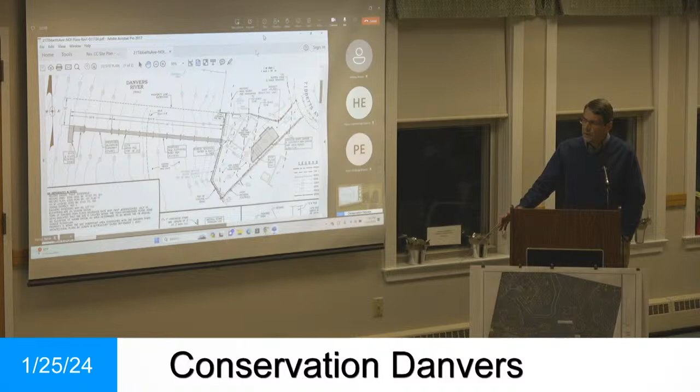There was a request that we consider increasing the spacing of the pile bents, so that's the spacing between each pair of piles here. Previously, we were at 15 feet spacing, and we've stretched it out to 20. We did look at some alternative materials that would allow us to go to 30 or 40 feet, but it more than doubles the cost of the pier, so it's unfortunately economically prohibitive. By using a better quality lumber on our stringers, we can get to this 20-foot spacing, and so we actually lost 4 piles as a result of that.

We ended up putting 2 of them back. You can see that that has a 10-foot spacing out there instead of the 20, and that's to better resist ice floes and materials floating up and down the river in the storms or in the winter. So it provides a little bit more resistance in that area, and we felt that that was important given the currents and given the location in that particular area.

We also lost 2 piles out in the float area. You can see we now have an L-shaped float instead of a T-shaped float, and so we lost 2 piles out in that area. So we do have an overall reduction of 4 piles, so that's a little less bottom disturbance.

Now we increased the length of the fixed pier about 9 feet, but we reduced the overall length of the pier and floats by 13 feet. So the overall length is 13 feet shorter than it was before. It's 32 feet off of the extension of the property line. I think we were around 25 with our T-shaped pier before. So this is a distance that would pass waterways review. It's pretty typical to be at least 25 feet in situations like this.

In this particular case, and I'll ask you to bring up the aerial graphic if you can, please. We have a waterway width of 510 feet at low water, and we're about 100 feet into it. So we're at 19.6%. So we are conforming to that 1996 Corps of Engineer guidance.

And I happen to have a high tide picture here, but this is a low tide picture. Let's see if we can pull it up. Sorry, I know, it's slow. We're getting there.

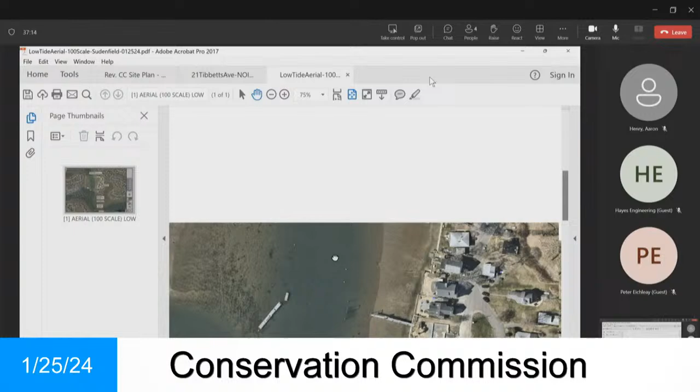There's the loop on Tibbetts. There's Mr. Sudenfield's property. And so here he is coming out 216 feet from the seawall to the end of the float. And there's the width. You can see the low water line very clearly here and over here.

So at its narrowest point in this area, it's 510 feet. So 216 is the overall length. It's 100 feet from low water to the end of the proposed pier, which is the 19.6% number.

I think you can also see the mooring balls in this picture. Here's the mooring balls. And this first mooring, by the way, is Mr. Sudenfield's. Those two are used for him to tie up his boat. And you can see where the navigational line is. It's between the mooring balls. And so this pier is going to have no impact on the navigational channel.

If you look at the picture in front of me, which is a couple of years after this aerial photograph was taken, you can see how Mr. Sudenfield's pier compares with the piers on Tibbetts Avenue. And it's really pretty comparable. It's about 55 feet further than the average.

Mr. Sanborn, the harbor master, points that out. But I think I would point out that we're only the distance necessary to get the deep water, to get the open water that we need. We're not a foot longer than necessary, and we, again, have no impact on navigation. We have no impact on mooring balls. We're 85 feet to the closest mooring ball, and that's Mr. Sudenfield's mooring ball anyways. So we have no impacts to moorings. We have no impacts to swimming, sailing areas, and the like.

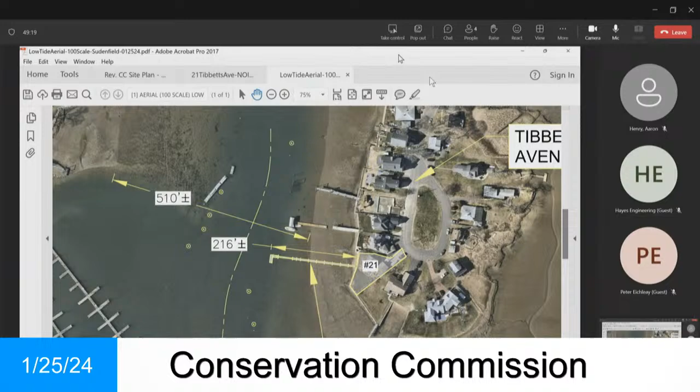So I guess if we go back to the engineering plan, we can see the bottom. Could you use the mic, please? Yeah, so if we go back to... Excuse me, comments come through the chair please. Through the chair, would you ask them to use the mic please? Thank you, Mr. Griffin, could you just speak with the microphone please?

I want to point out that the -11 contour runs underneath the float here, and I'll repeat this with the microphone in a second. So here's -10, -9, and so on. Each of those are 1 foot apart.

So the contour lines on the plan are 1 foot vertically apart and about 10 feet horizontally apart. That's why I said before, if we wanted to take 1 foot of water out of this system, we would shorten the system by approximately 10 feet in length. Does that address the question? Yes.

Shorten the system means make the pier 10 feet shorter. Well, either the pier or the float, or the combination, to get 10 feet closer to the shore. It would extend 10 feet less, instead of being 85 feet longer than the average, it would be 75 feet longer.

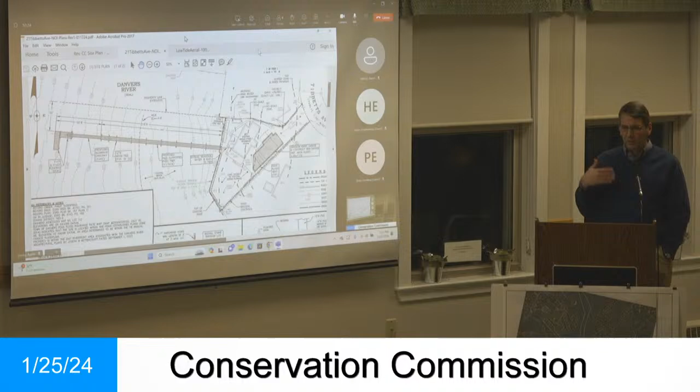Okay, so first there's a mistake in that calculation. The average of the existing piers referred to by the harbor master is, I think, around 170 feet. We're at 215, so that's 30 plus 30, 45... so it's about 50 feet longer than the average. But there are several on Tibbetts, I think two that are 170 feet, and one other. Anyway, I forget the numbers exactly, but I think we're closer to 55 feet longer than the average, that's what I calculated.

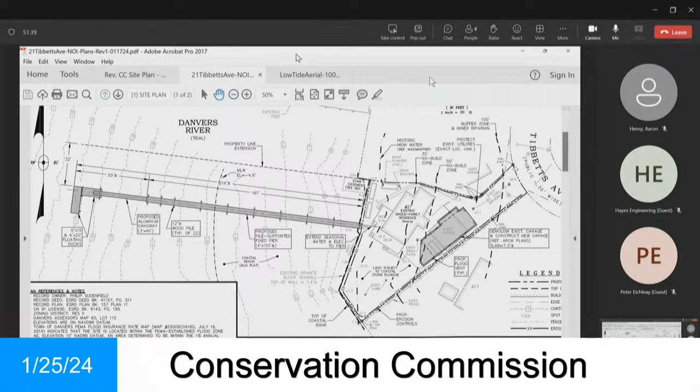I'm going to speak for the harbor master. I think you mentioned you're not adversely impacting the navigable waters. We're not impacting it negatively. His point is that these long piers impact the usability of that water, which is the public's water. If someone wants to take a sailboat out, they've got to go through this narrow channel of 50 feet or whatever it is, and that's his whole negative feeling.

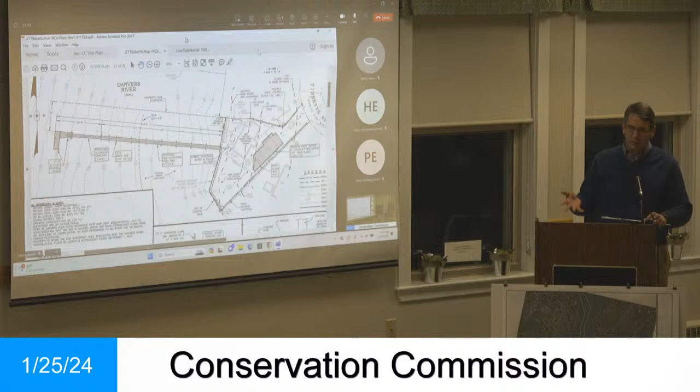So he wants those piers shorter, and it's quite a bit longer than 50 feet. I can show that to the harbor master, and to you on the aerial, but we had a 500-foot width at low water. Now, granted that's not 4 feet deep in all of that section, but 50% of that, going by the Corps guidance, would be 250 feet of open channel, right?

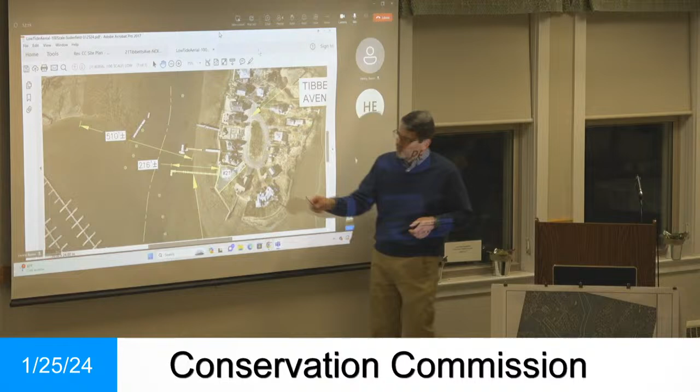And I'm just telling you, we're at 19.6%, we're not at 25%, so there's even more available than that. Now, the distance between the mooring balls is not 250 feet, this side to this side, but that's a lot more than 50 feet. I think you can just sort of visually see that.

All right, here's what I think we're going to do. Can I just say one more thing? Yeah, go ahead. Well, because visually what I see is, going with your number with the average, you have 55 feet beyond the average, that's the length of this building beyond, in other words, it's that much longer than the average. The building's a lot longer than 55, right?

Are we talking about this room? The 1-foot squares, I started counting up. Oh, I don't know. I thought you said the building. You mean the room? I mean the room. I see, the length of the room.

All right, well, let me try to meet with the harbor master. I'll go through the numbers a little more carefully, and if I need to pace out 55 feet at the next meeting, I'll do that. Okay, all right, thank you, Bob.

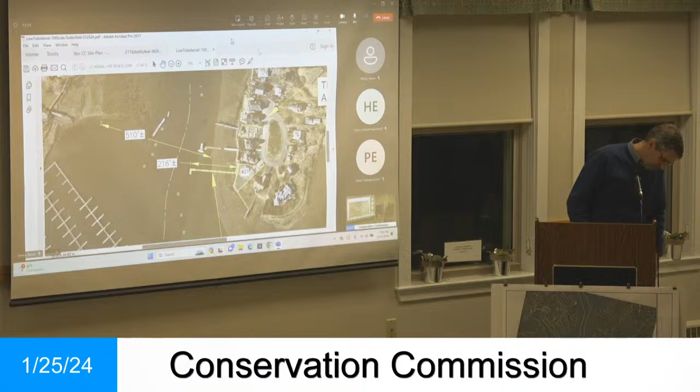Just to summarize, I think Aaron will try to push the harbor master to meet with these folks, we can make that happen. And I think generally we're comfortable, speaking for the group, with your square footage of the floats being 200 feet or less. Then you just need to get with the harbor master and reach some agreement on the length of the pier. If that can be done, then we'll go. We're certainly willing to try.

Thank you very much. Okay, so Aaron is going to work to get the harbor master and you guys in contact, and then we'll continue to our next meeting. We think we can have that meeting done in 2 weeks, and you could have your plans revised in 2 weeks? I hope so, yeah. Okay, for what we want to see, we want to at least see the floats, that's an easy one, thank you.

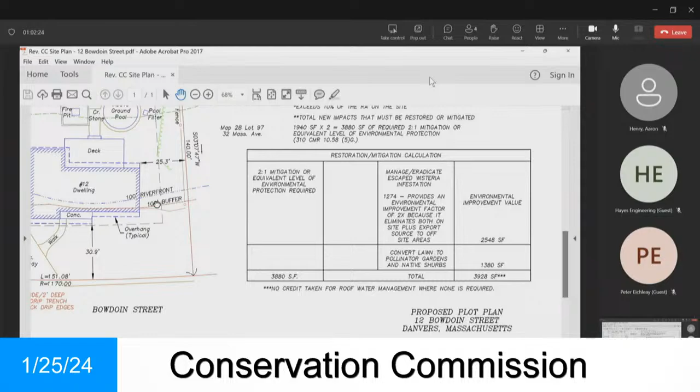Now there are 5 other standards at 10.58(5) that I have to abide by, and one of them is the redevelopment project has to be an improvement to the existing property. I would say by removing the wisteria and adding the additional mitigation shrubs, plus — let's pan over and see the house again — we're adding a nice roof water drip edge along the 2 edges of the property, or the roof line, so we're providing stormwater management. We're infiltrating the roof water runoff. So those 3 features are a tremendous improvement to the condition of the property.

Secondly, we have to manage stormwater in accordance with the requirements of DEP. Well, this is a single-family home, so there are no requirements for DEP stormwater, but we're doing it anyway with the drip edge here, so we meet and exceed that standard.

We have to be no closer to the river than the existing degraded area — they call structures degraded areas now. If we do, we have to provide mitigation, but you can see that we are no closer to the brook than the existing structure, so we meet that standard.

As you know, we do have our DEP number, and the DEP had no comments. I had a fairly thorough explanation and written narrative walking both the commission and the DEP through this redevelopment. They've been a little picky of recent, and I just wanted to make sure there were no ambiguities in how this is compliant with the regulations. So we hope the commission sees fit to issue an order of conditions.

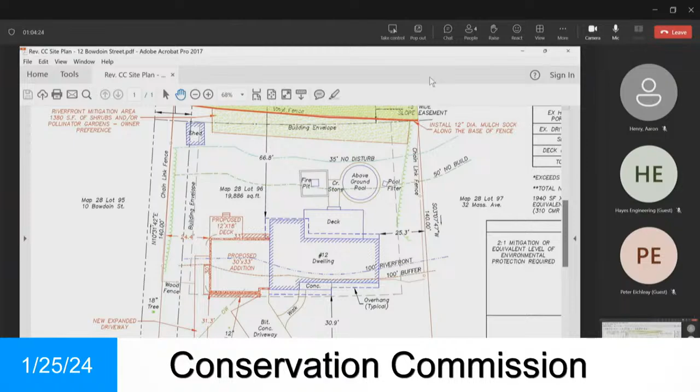Okay, thanks Bill. Mike, any questions? Yeah, Bill, with the mitigation, I think you said it was around 3,800 and some square feet of required mitigation. You talked about getting credit for getting rid of the invasive species. What is the actual mitigation on the ground that you're doing, in terms of the actual square footage?

So this area here, that's all going to be shrubs or pollinator garden — that's 1,380 square feet. And then there's an area of about 1,250 square feet, which we've taken credit for, 1,274 I think it says, 2-to-1 credit, because we not only remove the invasive species on the property, but it serves a higher value because we're also removing a source of export directly along the brook. This could flower, drop seeds, and it gets carried down.

This is on the property? And this is not beyond the property? The property line goes to — show me that — to the brook. Yeah, so this lighter green area here is the wisteria area. Okay, where do you get... and I know about wisteria and the other vine that people used to cut to have the berries for the holidays or whatever.

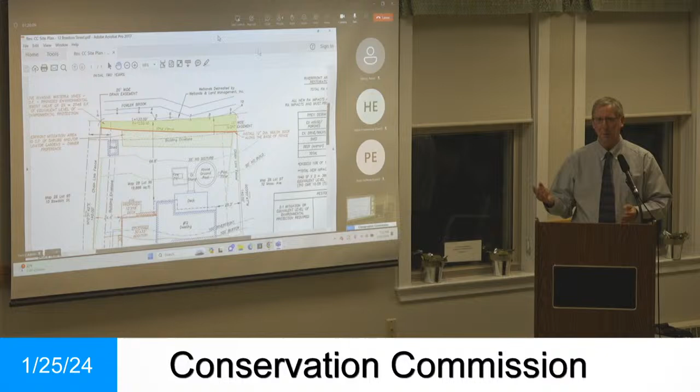We could put one in the middle, like one on each end and one in the middle. That's 3 total, that's not that many. I feel like if you just have the 2 on the edges... well, they're not going to know why they're there. But if he moves them in from the edge, 20 feet from each edge, and then puts 2 more, 2 or 3 is reasonable, 20 feet apart. Okay, so we do that.

Also, we'd like to see some evidence of what you've told us is there, so we can look at a before and after, some before and after photos. Staff would be able to go out at a later date and see if you've met your objective.

All right, anything else? That's a motion. Second. That's it. All in favor? Aye. Okay, good enough. All right, thank you.

Yeah, thank you. Just a reminder, it's a 3-year time limit on these. We'd like to see projects finished and back here for a certificate of compliance within 3 years. They should be back quicker than that, hopefully. When are you gonna start construction?

Shovels in the ground. He was saying you still need ZBA approval. Yeah, we're just saying we're going to issue this within the appeal period, so within 2 weeks. So from 2 weeks, from that point in the future, you have 3 years from that date to get back to us with the certificate of compliance, so more or less to have the project done. It's better to come back early rather than late. Okay, good luck. Thank you. Good luck.

Next up is a notice of intent for 191 Old Burley Street, DEP file number 14-1411.

The applicant is Flight Level Aviation. Good job, better than nothing. Good night.

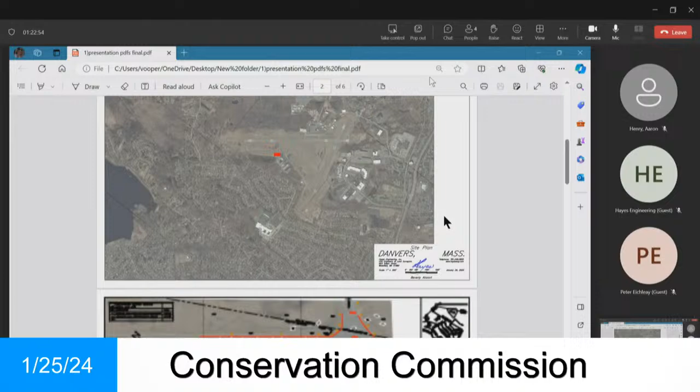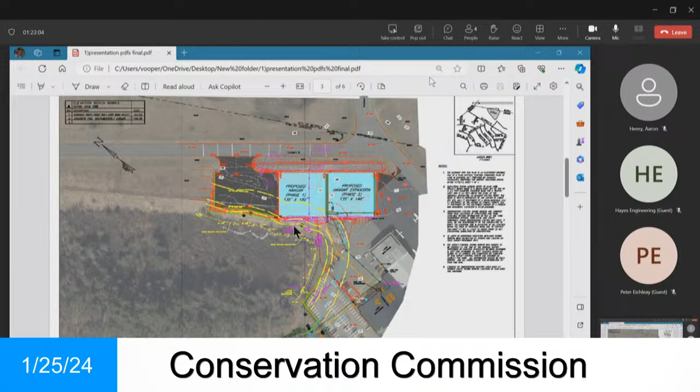This is a buffer zone project under both your regulations and the DEP's. It consists of the construction of possibly two proposed hangars to be done in two phases. Phase 1 would be 135 by 150 feet, about 20,000 square feet, on the left-hand side of the screen, and phase 2 is similar in size, although slightly smaller, for about another 20,000 square feet.

The yellow lines on the screen are the regulatory zones. The 0 to 35 is the first yellow dashed line from the wetland line, and the 0 to 50 is the second one. Then the 100-foot regulatory buffer zone is the last line you see.

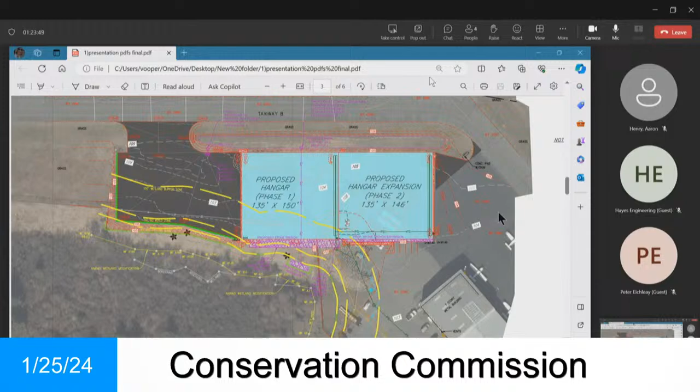We're proposing to build these two hangars and also the associated utilities, which Joe will point out now. We're going to run water, electric, cable TV, sewer, and gas to this hangar site from their existing locations. Some of these locations are within the 100-foot buffer zone, but none within the 0 to 50-foot buffer zone.

That's all underground? I believe that'll all be underground. Yeah, there's some current overhead now, but we don't intend to come off of that — we're going to go underground.

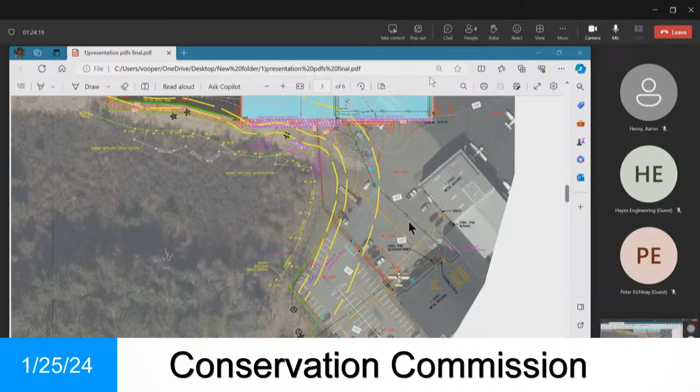There's an existing transformer near Flight Level. Joe, maybe you could point that out. We're going to come from that electric transformer and go underground with the electric.

Then the water line comes in from the corner of the blue lines you see down in the corner there, to the hangar location. We believe cable TV can come in the same route as the electric, and the gas is also shown, but they're all underground.

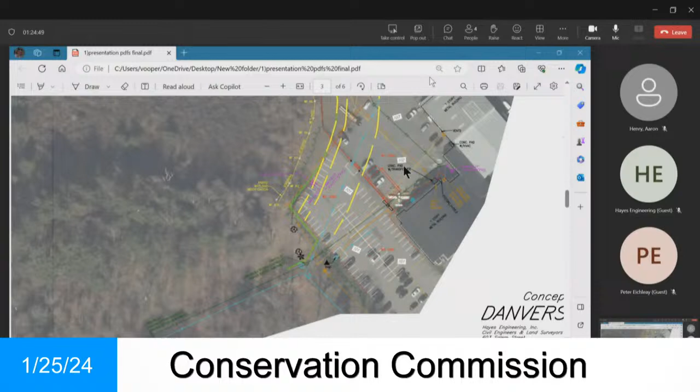As I indicated, it's a buffer zone project, and we can see in detail here the buffer zones, but we are asking to go into the buffer zones in accordance with your policy. I did provide a calculation in accordance with your guidance that's on the website.

The activities within the 0 to 35 foot zone are grading at the proposed ramp, the relocation of an 8-foot chain link fence, which is the security fence of the airport, and the construction of a level spreader.

The activities within the 0 to 50 zone consist of paving and grading at the proposed ramp, the relocation of the 8-foot chain link fence, the construction of a level spreader for stormwater management, the emergency egress from the hangar, a stone trench for the construction, and removal of an earth pile.

There's actually a discarded earth pile there, which Joe will point out, that has to be removed from the buffer zone. It's from some prior activity — I'm not familiar with exactly why it's there.

Now, I said it was a buffer zone activity, but this also requires stormwater mitigation. It's not a single-family home, which is exempt, as you just heard. The stormwater management here will consist of two forms, mitigation and recharge, both of which are required, and they're kind of separate systems in this particular scenario.

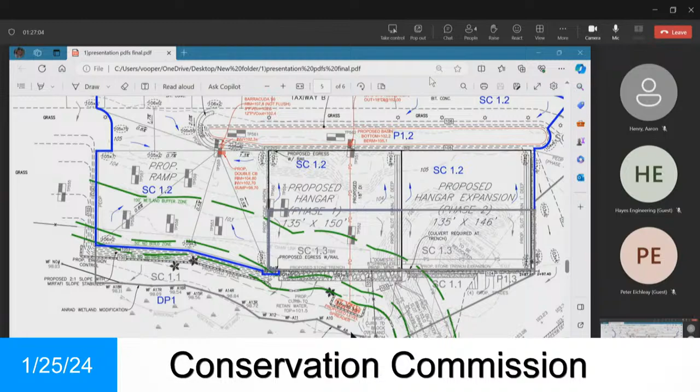That's in the stormwater management report we filed with you. That is a treatment train which consists of a deep sump catch basin over in the corner of the ramp area, a particle separator into the basin, an outfall, and then a discharge line that goes under the hangars to a level spreader that finally discharges to the wetland area. That's consistent with the stormwater management regulations of the state.

The recharge will be handled separately by infiltration trenches. As discussed last time, under the eave of this hangar there'll be a mitigation trench shown in red here, which is 12.5 feet wide, capturing the requisite volume for the ramp area and the area of the hangar shown under SC 1.3, but only the left-hand side.

So it captures that water Joe's pointing out to you now and infiltrates it in the 12.5-foot wide trench. That will be constructed in Phase 1, and the entire stormwater detention area is designed to be handled in Phase 1 as well.

In Phase 2, there'll be a stormwater trench constructed, but it's only about 4 feet wide, because we only need to mitigate that part of the hangar that was not mitigated in the first phase. As I indicated, the retention pond is going to be sized and constructed in Phase 1 for the entire project.

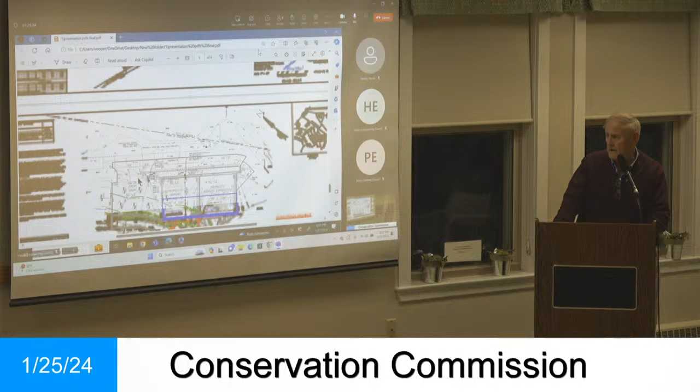We submitted, and maybe you can go to that slide, Joe, a number of test holes that we dug out there. We asked for permission to do so when Georgia was still here. It's basically a glacial till material, not highly permeable, but we're capturing the required water volume to infiltrate, so over time it will hopefully infiltrate. And a lot of it is fill material, there's no question.

I'm just concerned that with this impervious square footage, that water's going to get into the wetlands, which theoretically could make the wetlands grow. Well, and theoretically it does now if it's impervious, so we can't change the underlying condition. So you're saying right now it is impervious? No, it's not impervious. It's glacial till, but it's quite tight.

So it's not a sand or a gravel. But it's not impervious. It acts like essentially impervious, right, Peter? It's pervious, yeah, but it's not a sand or a gravel, so it's not impervious, certainly.

So is it grass or is it pavement, the area? Oh, no, it's not covered with an impervious surface, no. It's vegetated. I don't know if I'd call it grass, but it's vegetated. And it's maintained by the airport. Maybe we could go back to that airport slide, Joe?

Okay, well, we don't have to waste too much time on it. Just, well, I was just concerned about how much water, but I think we want to get out there, so I thought it was a good question you had, because if it's some kind of hard pack and it doesn't absorb water, then it's impervious, right?

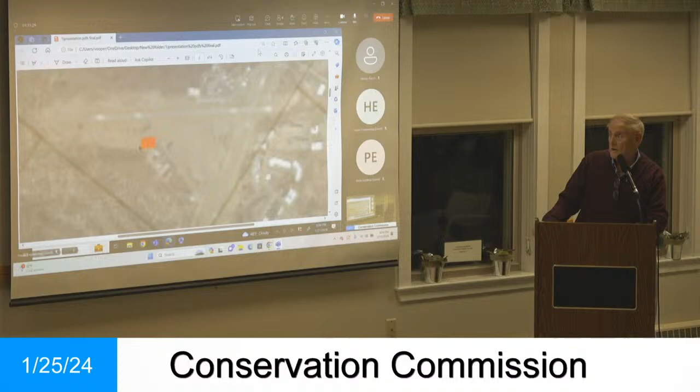Well, yeah, but impervious is no flow at all. There are various levels of perviousness. Can you go back to the first photograph? The area is basically, I wouldn't call it grass, but it's maintained, it's mowed. You can see that the hangar is in the mowed area right there, and the wetland is the darker area. But even a grass surface with loam has some level of perviousness, and it's reflected in the hydraulic calcs that we submitted to you.

Okay. Mike, any other questions?

So you're right up to the 50, so you'll have to be working from the other side to construct that, correct? Correct, but that would be in the area of the infiltration trenches anyway. The infiltration trenches are part of what we asked for, the location in the buffer zone. I'd expect all the construction can take place between those two areas - the 12 and a half foot strip where we're going to put the infiltration, and then the hangar wall.

If this was, say, a gas station, something with gasoline, solvents, oil - how is that contained so it wouldn't get into the resource area? Any of those materials are going to be inside the hangar itself, and under the state sanitary code, it's required to put a oil water separator, and we've shown that on the plan.

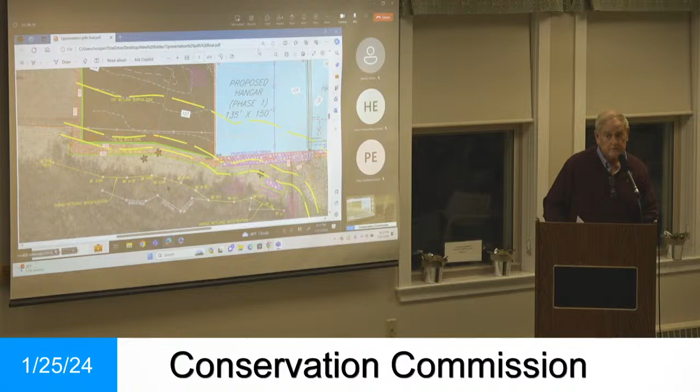We've had that on a couple of other projects here. It's not really a permit. But it wasn't a big hurdle either, it sounds like. No.

And you call this a storage hangar? What did you call it? It's for storing airplanes, right? It's a storage hangar, not a maintenance hangar.

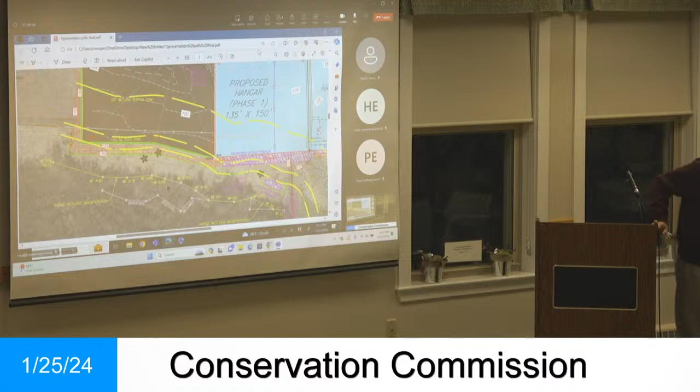Good evening. I'm Attorney Effie Paniotakis. I do represent Mr. Cosmas Agilikas, affectionately known as Gus, and his wife also sitting over there, Jonna Agilikas. They are abutters to the airport on the Danvers side at 91 Burley Street. Mr. Agilikas will address his concerns.

91 Burley Street, that's the street that runs down parallel to the runway and up to... My house abuts the fence at the last runway, and I've been getting flooded out for the past 24 years. I got oil and all kinds of stuff going through my yard. I've tried going to the town of Danvers. I tried contacting these people. I get nowhere.

Now I'm in the middle of getting - I have a city drain located on my property, which was granted back in 1972. There is an exhibit. Not in 24 years has anybody come back there to clean that drain, do anything. The ground eroded so bad that Burley Street floods out because of it. All the snow from that back runway goes to the back of that fence, which I have aerial shots of. And they want to keep building and putting stuff up, but where's the storm management?

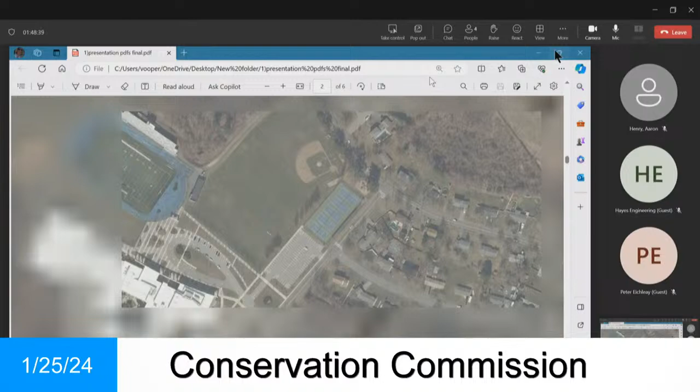Whatever the numbers are, explain this with a slide if you let us. You go ahead, but just briefly, please. Are you gonna tell them how to fix it, or are you going to just?

No, I haven't looked into how to fix it, but I do know that the original indication was that Flight Level Aviation leased the airport, and we do not lease the airport. We lease a small site of the airport, and we had an opportunity to review the attorney's letter as it relates to runoff, which could be a concern for your commission.

If you just give us a minute, we can put up a slide that shows the watersheds and the location of 91 Burley Street relative to the proposed project. It's a big file because we analyzed all the watersheds in the area. Let me just summarize.

There's the proposed activity, and the flow from our site - it is airport runoff, but it goes first in a westerly direction by the arrows you see, then southerly, then back southeasterly, coming down and entering Fishbrook, and discharges down there. From 91 Burley Street, the subject property she's talking about, the runoff comes off the airport and goes through their yard, into a subsurface drain, and discharges there. So our proposal is not even in the same watershed.

I think she may need to take that up with either the Airport Commission or the town of Danvers, but it doesn't have anything to do with our project at all. I agree, and nothing you do with your project is going to add or subtract to the issue. No, not at all, and we have stormwater management for our project.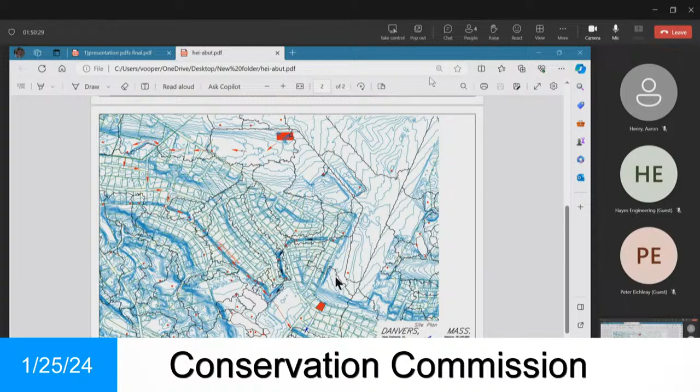We want to thank you all very much for allowing us to be heard. We hope that perhaps we'll pursue this with respect to other municipalities and with the town regarding the drain. It sounds like this has been going on for a long time. We'd like to address it with the airport and let them know this is occurring. It may not be part of your project, but generally speaking this is an impact by the airport to the abutting neighbors to a large degree, and if you could take that into consideration in future projects, or at least take the impact into consideration now, because this is an issue we shall continue to pursue. So we thank you very much, and we hope everyone has a good evening. Thank you.

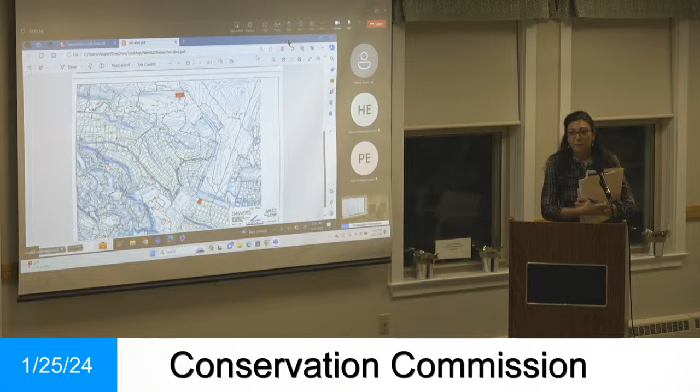Mr. Wilson, on the drainage issue with the easement on that property, we also discussed this. We haven't had a conversation with the engineering division yet, but we made sure we shared the packet that you provided, because to us that's a related but separate issue - if we have an easement on your property and we're not maintaining it, we need to look into that. So we're going to try to follow up on that as well.

My name is Sharon Gavoni, I live at 165 Burley. We directly abut the airport. So as a simple woman and a layman, this doesn't mean a thing to me. It doesn't mean anything to me. So I guess what I'd like to know is...

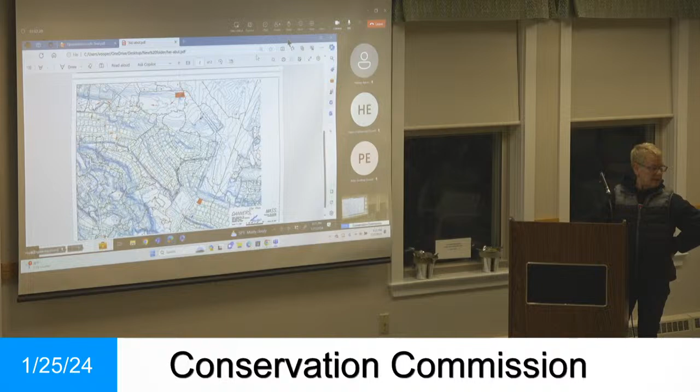Simply, if I was pulling into that airport driveway at 191 Old Burley Street, where are those sheds being built from there? Or hangars, or whatever you're going to call them, which I still don't understand. I got this letter saying I should come to this meeting. What do we need these things for? What are they? I'm a simple woman - what are they? Are you going to put the picture up that shows where they are? Just tell me, I'd rather you just tell me.

If I pull in the driveway - showed that, ma'am. I understand that, but she wants to see it relative to her property. When you pull into the airport driveway on the Danvers side, that's the big parking lot in front of the entire operation. The red square indicates where we're going to build it - it's behind the maintenance hangar and the ramp where the flight school has their small planes. So we're pulling in the airport driveway and going to the left?

Yep, and then all the way to the left you would see this hangar behind the existing maintenance hangar. But there's going to be two, not one. Well, it's actually combined, but built in two phases. And why do we need these? There are people who want to base an aircraft here that needs hangar space.

I don't need to be fresh, I just want to understand. That's my property - where is your property on this picture? 165 Old Burley - is it along here? No, it would be along this way, actually.

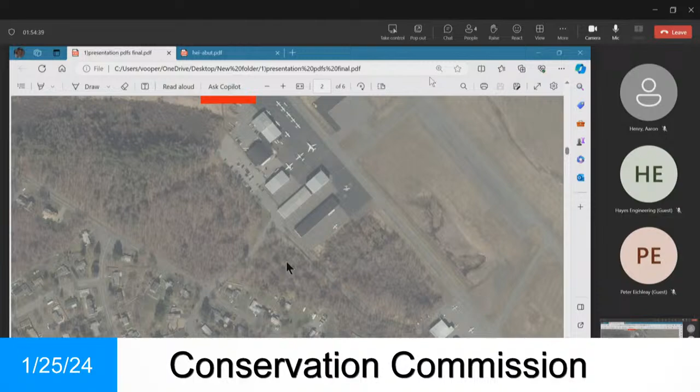Well, that's the ramp to the southern hangar. Okay, that's why I'm telling you I am a simple woman, you see what I'm saying? Why don't you point out what Burley Street is? Old Burley - so this is Old Burley, and that airport is right behind my house. I smell jet fuel in my yard. Those crop dusters, we call them, since 2014 - they go off about every 3 minutes now. But that's not the point. Her property is the fourth one from the right, from the bottom right here, in this direction - fourth house to the right. Okay, so a lot of questions.

Let me see if I can break it down and address that, and try to make it simple to understand. So I believe one of the questions is why are we doing this? This is one hangar - think of it as one hangar, but it'll be built in two phases. It'll look like this building. We're going to build half of it, then build the other half. We might build it all at once, but we want to address and let everybody know this is a long-term plan.

The airplanes that are going to be kept in here are not the small planes you probably see a lot of. They're going to be something like that twin-engine jet. Right now there's inadequate hangar space on the airport to house these jets. So currently these jets are based someplace else, long distance from here, and they fly in with no passengers other than the crew, and they pick up the owner and/or passengers.